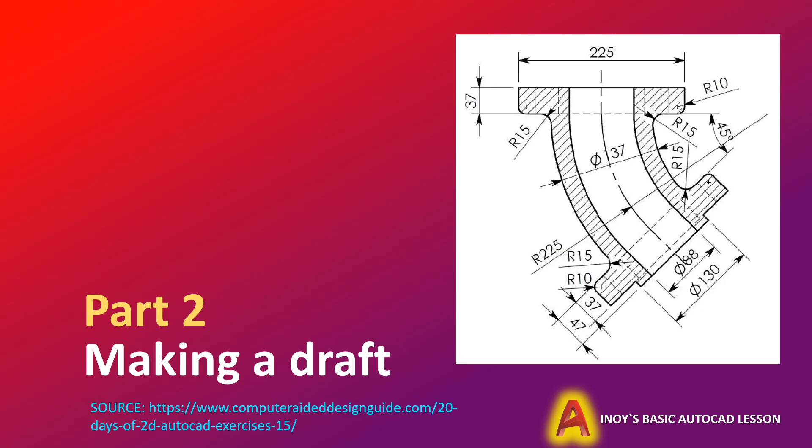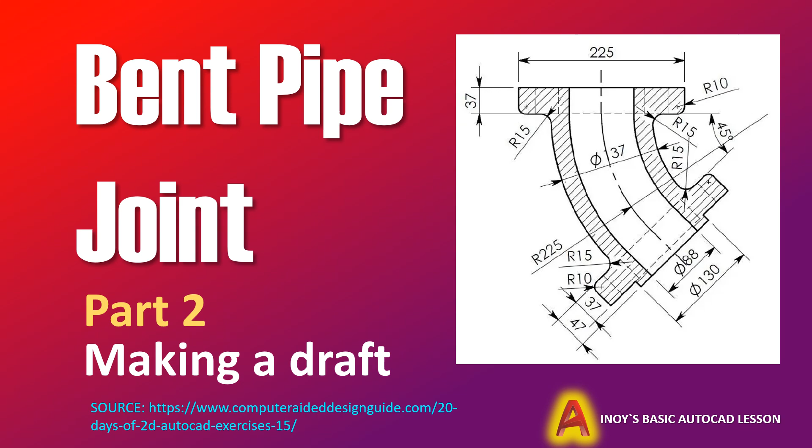Okay, before we proceed to our topic, which is we are going to make a draft on this object, let's double check our layers. Okay, so center line is point 15, your object is point 5. Okay, our hidden line is point 25. Let's check. Okay, that's it. Now we are ready to make a draft on this object.

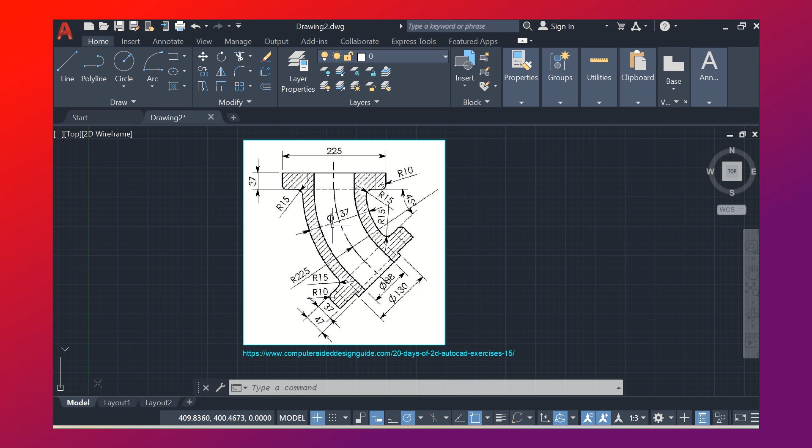Okay? For me, in my own observation on how you're going to draw this one, or how are you going to make a draft on this one - given the diameter, given the radius, at the center of this. So we have a center line here. Okay, we have a center line. This means that this object, if you look at it from the top, is a circle. So that's why it has a center line here. Okay? This is a hidden line.

This is hatch. If we go back to our lesson on the alphabet of lines, hatch is a section line. These are section lines. Okay? So we have dimensions here: 130 diameter, 88 diameter, radius 10, radius 15, diameter is 137. This means from this point to that point, that's a circle, its diameter is 137.

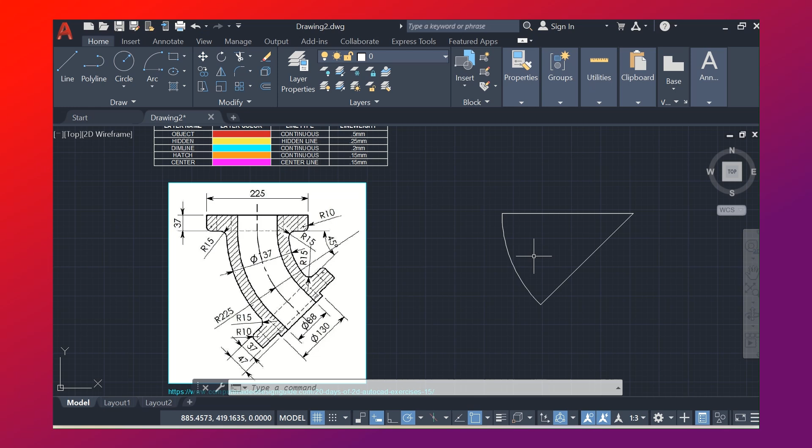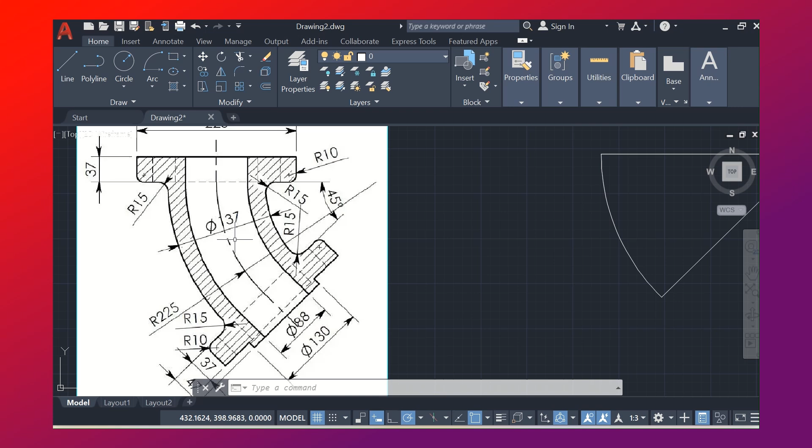Okay, so what we need to do next is make these two sides, which has a diameter of 137. In my solution, what I thought of is I am going to divide this into 2. So 137 to get the radius. Okay, or to get my offset, I'll offset this.

Okay, so let's use the calculator. 137 divided by 2, so we get 68.5. So I'll offset, offset 68.5, enter. This one, inward, then this one, outward. Okay, our object is starting to show.

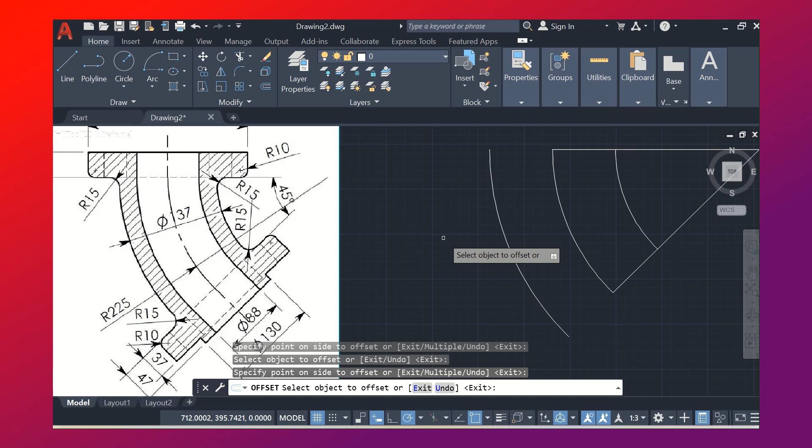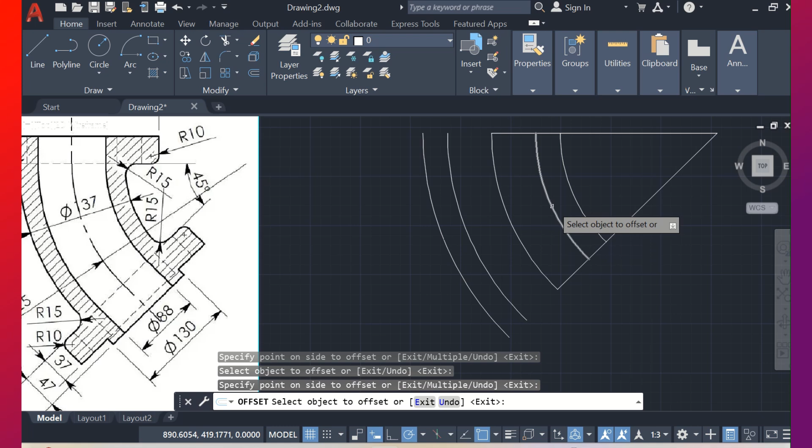So what comes next? I need to lay out this again, 88 is the diameter. So, 88 is the diameter. So, 44, divide that by 2, 44. So, offset again by 44 here. Okay. So, we got this.

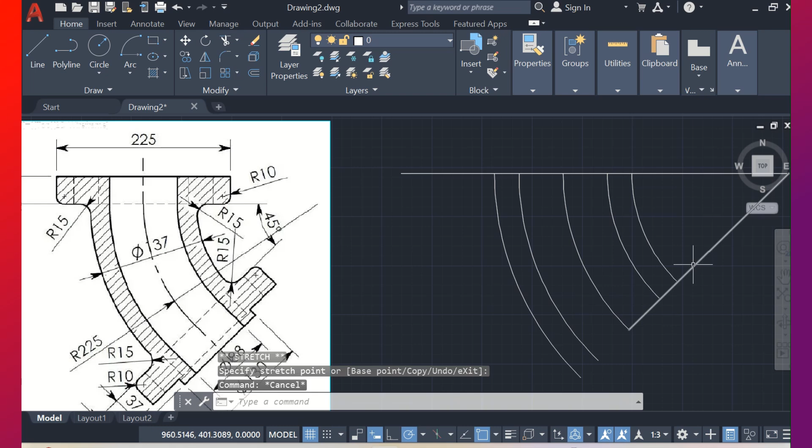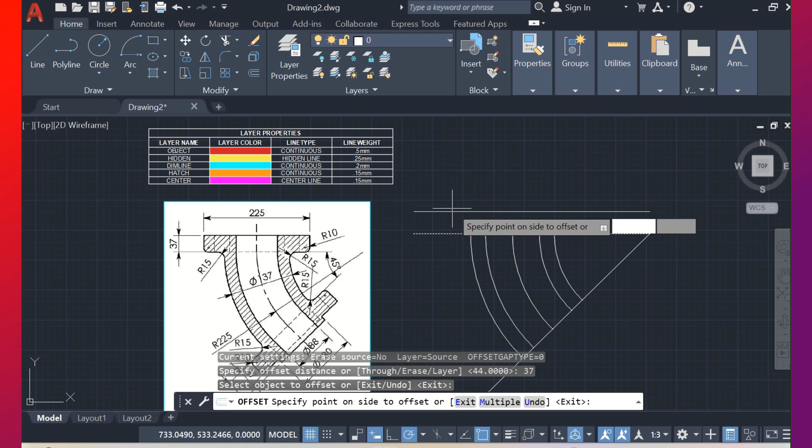So, what we'll do is offset by 37. From this point, going up, 37. The same here, 37 and 47. Okay, we will offset. So, first, offset by 37. Offset 37, and click. Then click. Okay. Then another offset of 47. Okay, from this point. So, offset by 47. Okay, that is 47. Next.

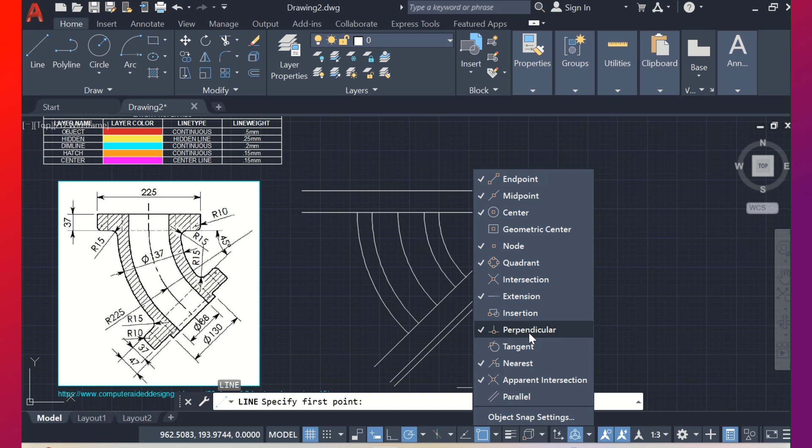Line, starting from this point, going up. When you see the perpendicular sign, click it. Enter again. Then it should be perpendicular. Enter again. So, let's do this again. Perpendicular. Line. Should be perpendicular. Okay.

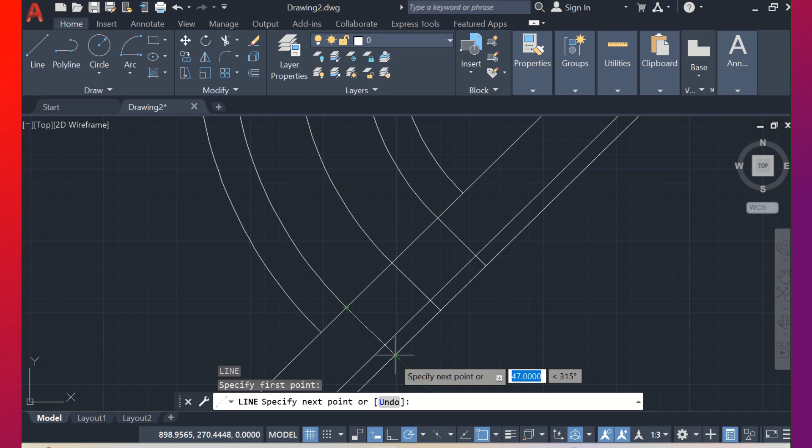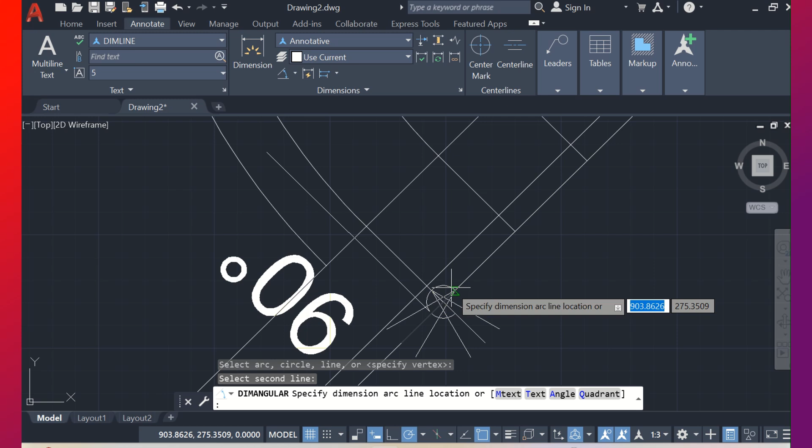Okay? Then, we have... Okay, let's double check. That should be 90 degrees. So, let's check the angle. It should be 90 up to here. So, 90, correct? Let's check the other side if it's 90. Let's click here, click there. And you have your 90. Okay, correct. Same here.

This time, let's offset this by... this is 225. Let's divide that by 2. 225 divided by 2, we have 112.5. So, let's offset this. Offset 112.5. Enter. This one, going that way. This one, going that way. The same on the other side. Okay.